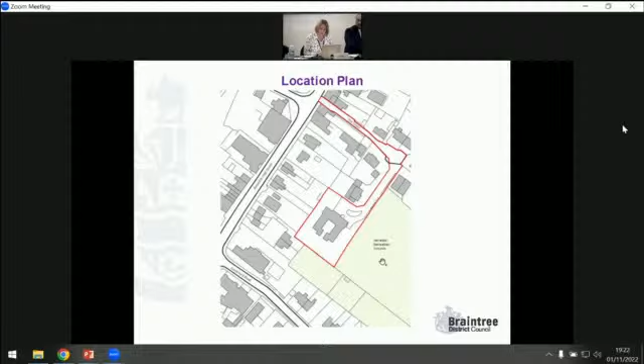Here's the location plan, the site edged in red. You can see it's just behind the High Street. Access is via the Chase and then extends along here to the existing care home, which as we've heard is vacant and provides 10 beds with a caretaker flat. The site lies adjacent to the Kelvedon recreational ground, and within the conservation area.

Looking at the existing site plan, you can see the access via the Chase alongside the social club building. Parking and turning is provided at the front, and the existing building is this U-shaped building here. Existing trees lie around the site and on the adjacent recreational ground.

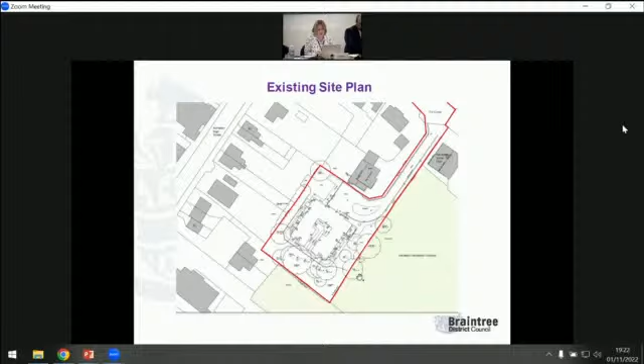Looking at the existing ground and first floor, we can see it's a single-storey building, so all of the accommodation for the existing vacant care home is at ground floor, and as we've heard, the sizes do not comply with existing standards. The first floor contains the caretaker's flat.

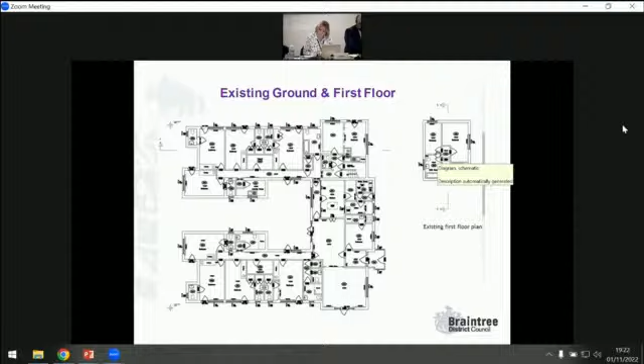Turning to the proposed site plan, the existing access remains as per existing. Parking and turning is provided at the front, with 9 parking spaces, a detached refuse and cycle store, and as we've heard, the building is extended and altered to infill the existing U-shape to create this square formation.

The gardens have some formal and informal paths and a seating area, and the existing landscape is retained.

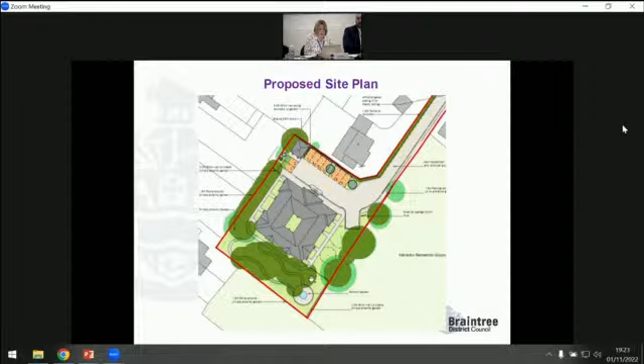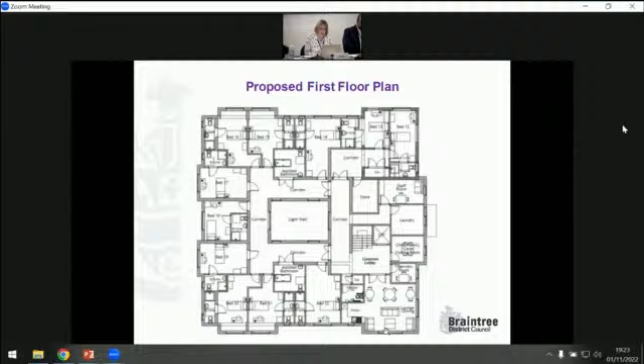The first floor plan follows a similar approach, with those bedrooms looking out onto the landscaped gardens, and the first floor lounge area faces out into the landscaping and the adjacent recreational land.

Looking at the elevations, as we've heard, officers have engaged in lengthy discussions with the agents regarding the design. The design now is well presented, well proportioned and has a symmetrical approach. In terms of materials, it would be render with a slate roof.

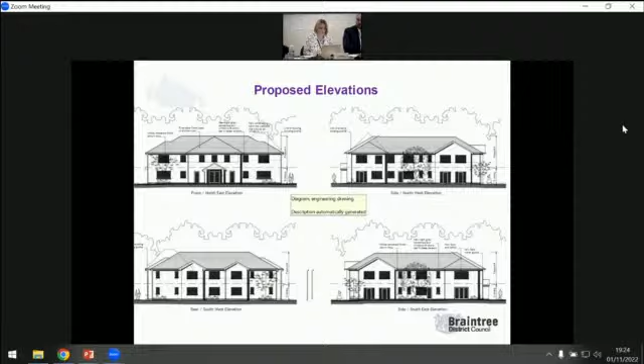The detached bin and cycle stores, we've heard, are sited discreetly in this corner, again with a similar approach in terms of render and slate materials.

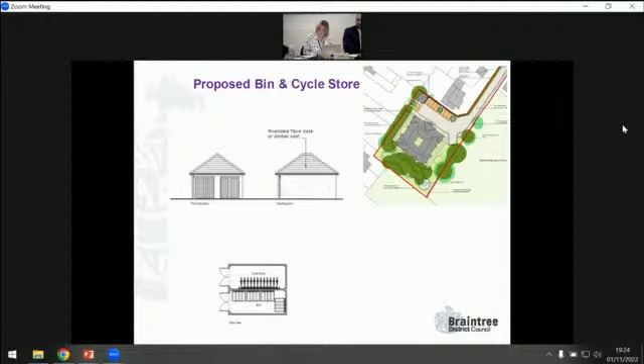There is a member update to you this evening regarding some of the conditions. Condition 3, relating to materials of construction, we're proposing to change the trigger so that no above-ground construction works begin until the materials have been agreed. Similarly, condition 4 relating to means of enclosure is changed so that the trigger is now prior to installation of such means of enclosure.

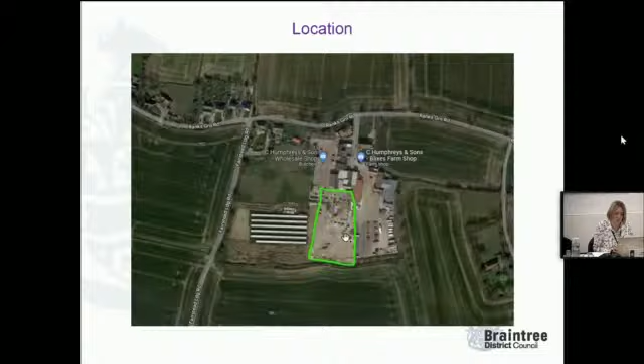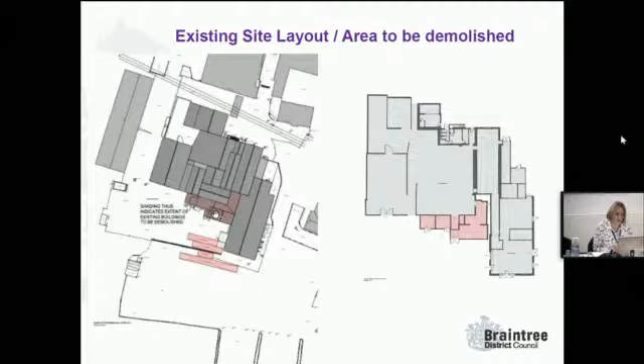So just looking here at the existing site layout, there is some proposed demolition - demolition here of existing extensions to the building and some outbuildings and structures, as we can see. Officers are supportive of the removal of these extensions because they improve the visual amenity of the site.

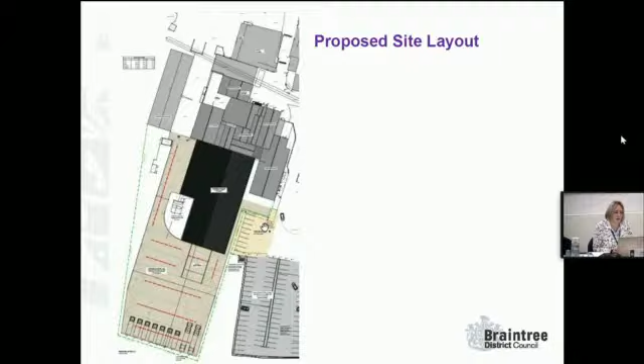In terms of the proposed site plan, the extension here is this dark grey area. It creates 1,190 square metres of floor space and also proposes this HGV loading docking area. We can see a dashed green line here, that is proposed fencing required as a means of security. The gas tanks and radio tower, which we can see here, are to remain. Again, you can see the existing staff and visitor parking, which is to be more formalised.

I've added here a comparison between an extant permission. So the extant permission on the left-hand side was granted in 2020 for an extension to the building and a similar HGV docking bay. That remains extant but has not been implemented. If you compare that now with the proposed site, a similar amount of floor space is created and a similar layout in terms of that HGV docking loading area. The reason for that change is just to accommodate the needs of the business.

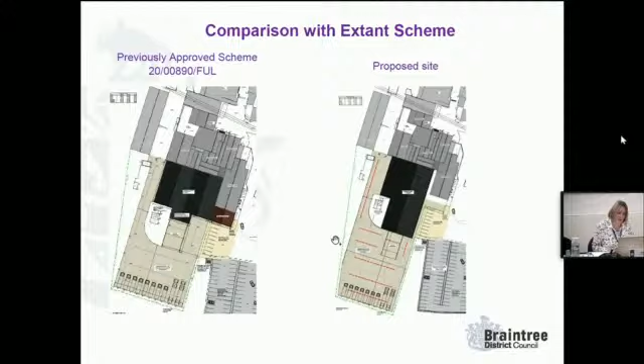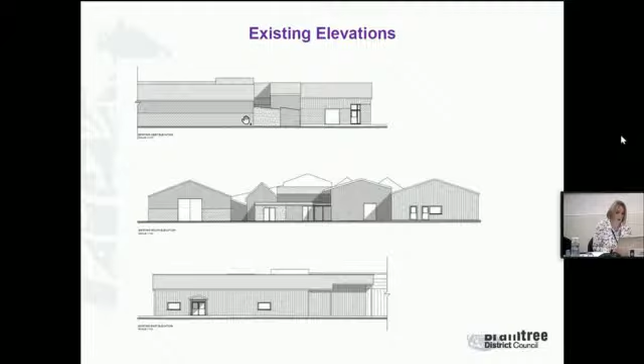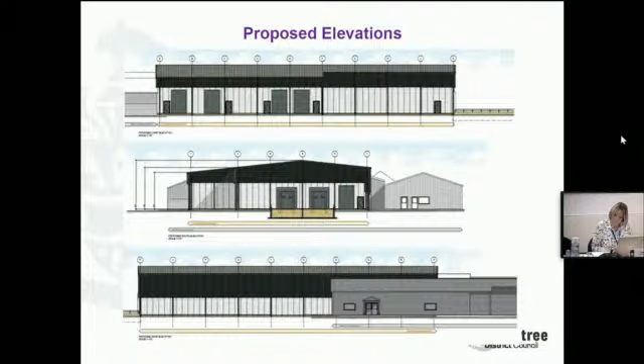The application has also been submitted with a proposed traffic management scheme. Here we can see the existing staff and visitor parking, no change really to the siting of that. And here would be the HGV area and parking movements. This plan also shows the existing fencing and some proposed landscaping, which we've proposed to add a condition on to secure.

In terms of access, it remains the same, so it would still be off Ranks Green Road as per the previous extant permission. Essex County Council, as the Highway Authority, have no objections and do not consider that the proposal would lead to a significant increase in traffic movements.

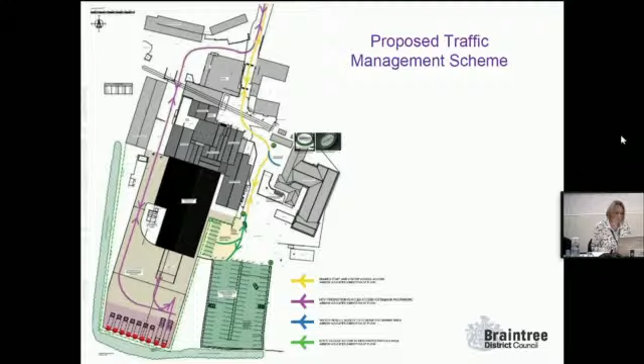Another update to members this evening in terms of condition 6. We're looking to alter the existing condition 6 relating to lighting. The applicant has made it quite clear within the submission that no additional lighting will be proposed to the site, but officers are seeking to impose this in case once development commences, lighting is proposed. It's fairly standard, similar to our standard lighting condition, just requiring details of siting and design, including lighting design for biodiversity, prior to the installation of any lighting at the site.

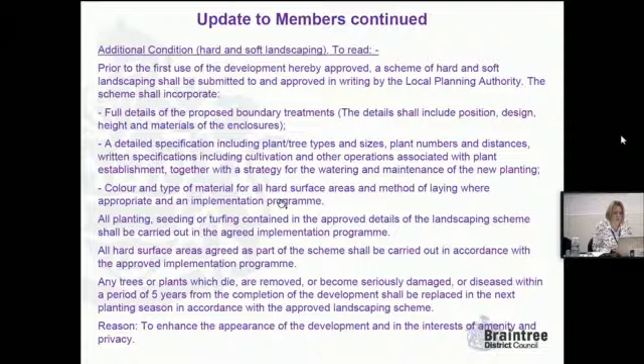We are also seeking to add a new condition this evening relating to hard and soft landscaping. Fairly standard in terms of wording, requiring details of boundary treatments relating to that new security fencing proposed to be erected, and details of planting, the screen planting we saw on the traffic management scheme, together with details of hard standing. So we're looking to impose that additional condition.

Turning to the planning balance, officers consider there are no adverse impacts to the development. In terms of benefits, there would be the expansion of the existing local business, economic benefits in regard to supporting this rural business, and the development would result in an improved design and layout for the existing facility. Officers consider that having regard to the adverse impacts and benefits and the requirements of the NPPF as a whole, the benefits do outweigh any harms.

So our recommendation this evening is that planning permission be granted, subject to the Section 106 legal agreement, to secure financial contribution towards open space. Thank you very much, Lisa. Members.

Councillor Mrs. Parker: Okay, well, this is obviously a very straightforward application. It fits in with the policy of supporting existing businesses and expansion of existing businesses. I think the buildings are going to be very suitable for the type of existing agricultural buildings that are there. I'm pleased to see that there's going to be some planting around the fencing, which I think will improve the overall appearance. We don't have any objections, and I'm happy to support the officer's recommendation, happy to move the officer's recommendation to approve this application.